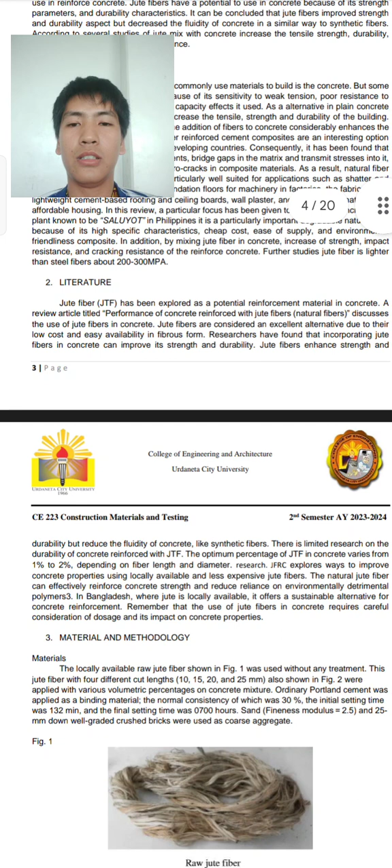Let's first tackle the literature. Jute fiber has been explored as a potential reinforcement material in concrete. A review article entitled Performance of Concrete Reinforced with Jute Fibers, known as natural fibers, discusses the use of jute fiber in concrete.

It enhances durability but reduces the fluidity of concrete like synthetic fibers. There is limited research on durability. The optimum percentage of jute fiber in concrete varies from 1% to 2% depending on the fiber length and diameter.

So let's proceed to the material and methodology. The locally available raw jute fiber is shown in the figure. As you can see, there are different sizes: the 10 millimeter cut, then 15 up to 25 millimeter cutting.

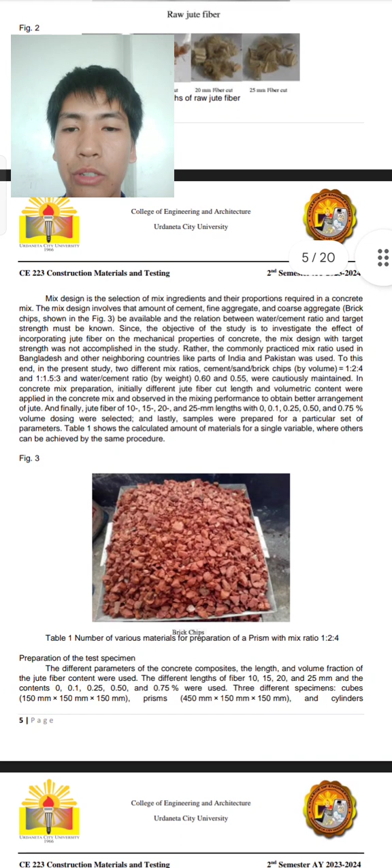In concrete mix design is the selection of mix ingredients and their proportions required in a concrete mix. The mix design involves the amount of cement, fine aggregates, and coarse aggregates. The relationship between water-cement ratio and target strength must be known, since the objective of the study is to investigate the effect of incorporating jute fiber on the mechanical properties of concrete.

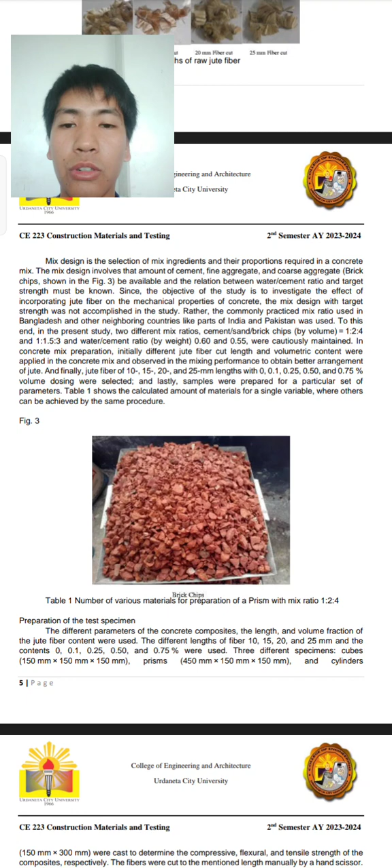So what are these ratios? What are the sample ratios? By volume, cement, sand, and brick chips of 1:2:4, and next 1:1.5:3. The water-cement ratio by weight of 0.60 and 0.55 was cautiously maintained.

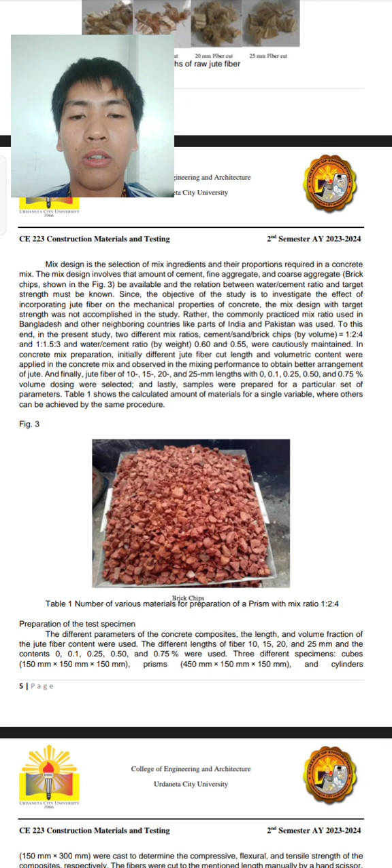For mixing performance, to obtain a better arrangement of jute, finally jute fiber of 10, 15, 20, and 25 millimeter lengths were used, with 0, 0.1, 0.25, 0.50, and 0.75% volume dosing.

We can see table 1, which is the preparation for the test specimens. Let me zoom in. It shows the different parameters of the concrete composite, the length and volume fraction of the jute fiber content.

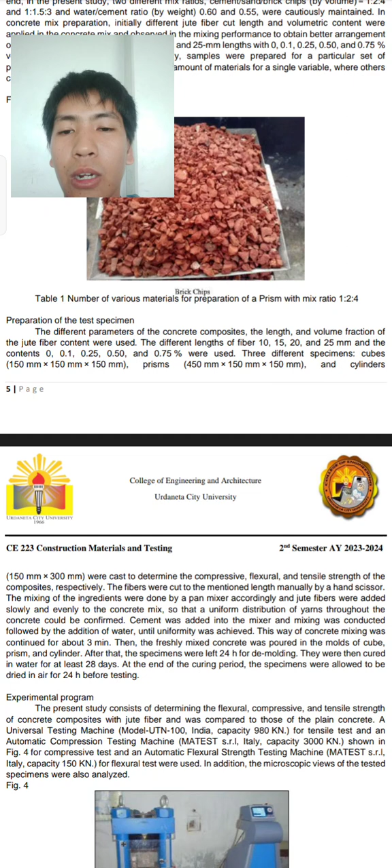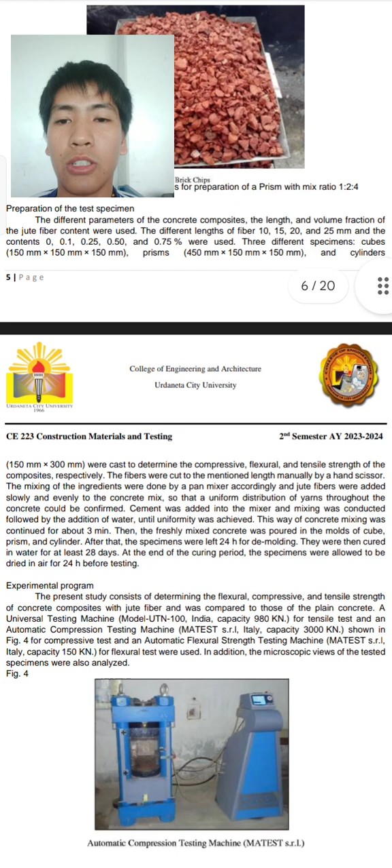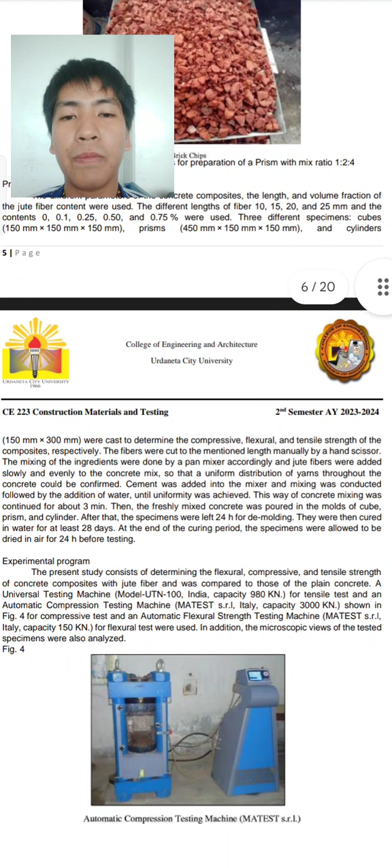We used different lengths of fiber: 10, 15, 20, and 25 mm, with contents of 0, 0.1, 0.25, 0.50, and 0.75%. We used 3 different specimen groups: 150 mm x 150 mm x 150 mm, the prism one at 450 mm, and cylinders 150 mm x 300 mm.

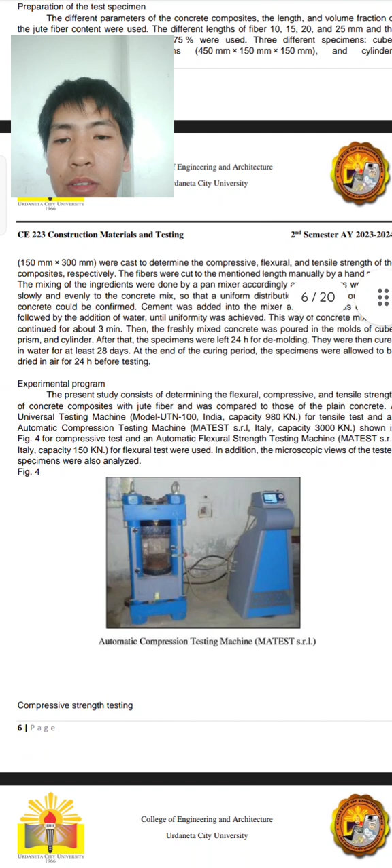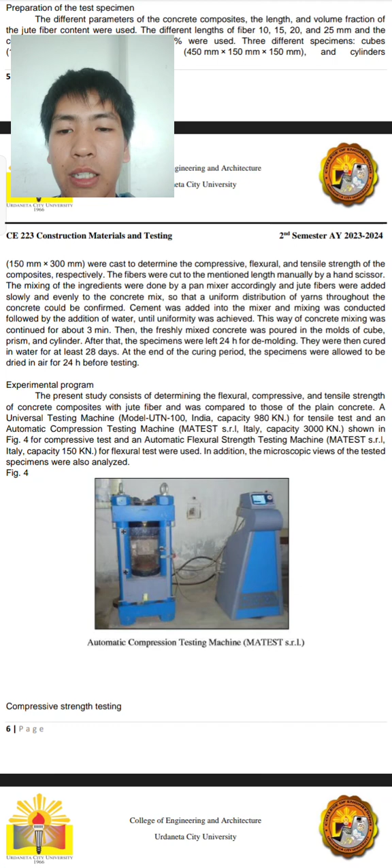Next is the experimental program. The present study consists of determining the flexural, compressive, and tensile strength of concrete composite with jute fiber, and this was compared to plain concrete.

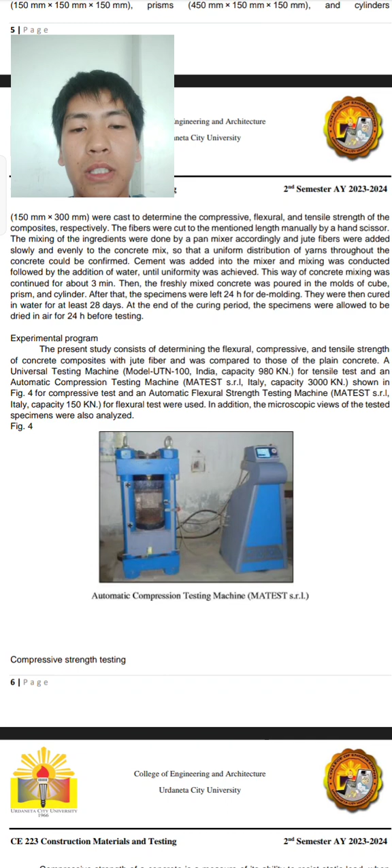The universal testing machine, model UTN 100, from India, with capacity of 980 kilonewton, was used for the tensile test. An automatic compression testing machine, MATEST s.r.l from Italy, with capacity of 3,000 kilonewton, and another from Italy with capacity of 150 kilonewton, was used for the flexural test.

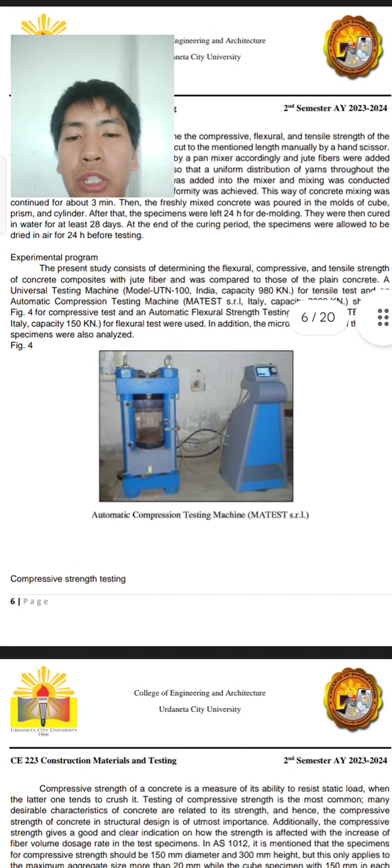This is called the automatic compression testing machine. Compressive strength of concrete is a measure of its ability to resist static load. Here we measure its resistance to static loads, meaning loads that do not move.

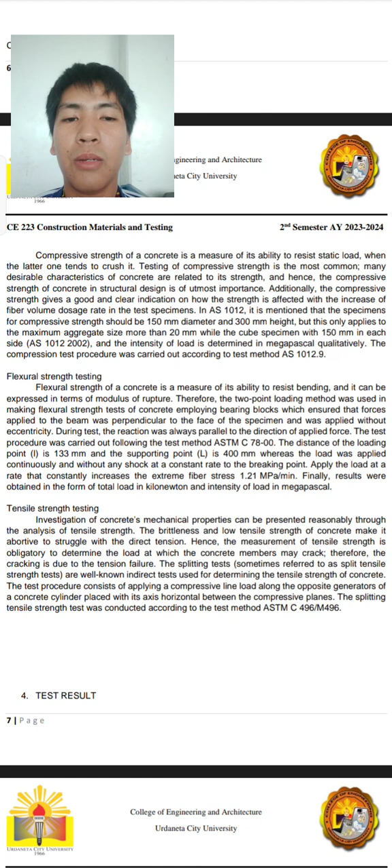The latter one tends to crush it. Testing of compressive strength is the most common and most desirable characteristic of concrete related to its strength. This is the most common test needed for these kinds of construction materials.

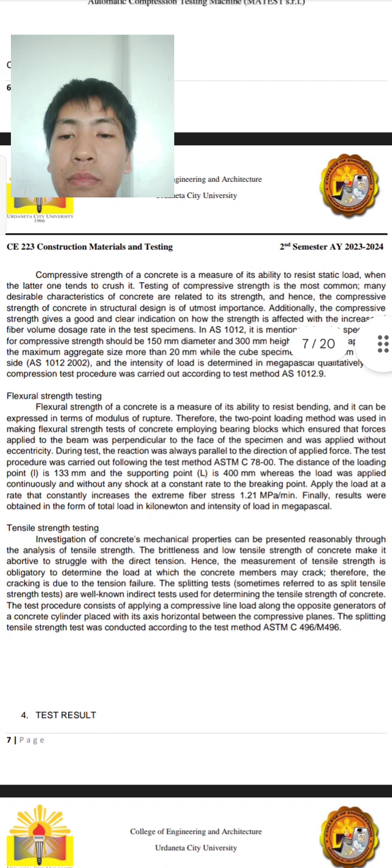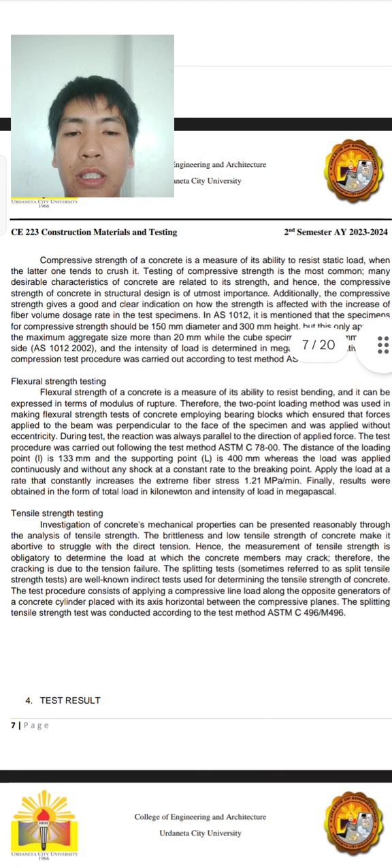Next is the flexural strength testing. Flexural strength of concrete is a measure of its ability to resist bending. This is also one of the most important tests because it tests the ability to resist bending, so that it doesn't bend or break.

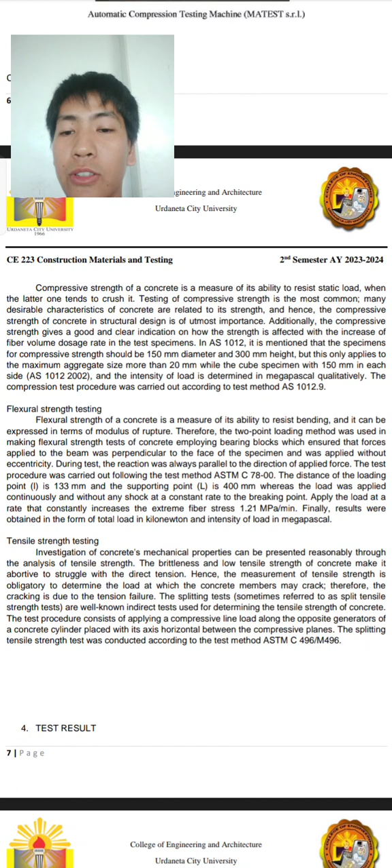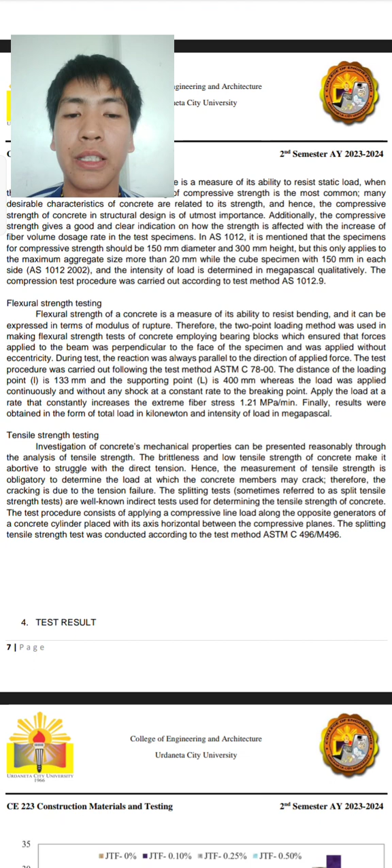Next is the tensile testing, which is an investigation of concrete's mechanical properties that can be presented reasonably through the analysis of tensile strength. Now let's move on to the test results.

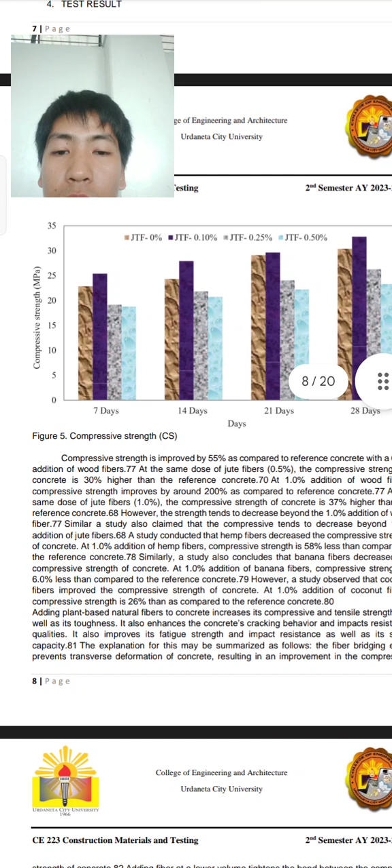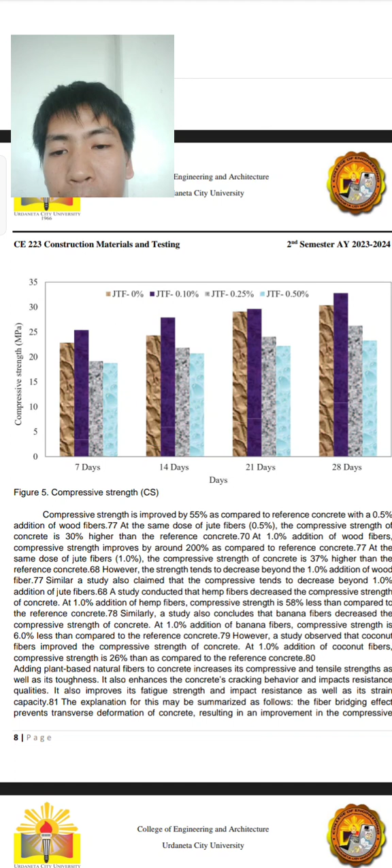So andito yung days - 7 days, 14 days, 21 days, then 28 days. Dito sa gilid, makikita natin yung 0 to 35, yan yung MPa, which is the compressive strength.

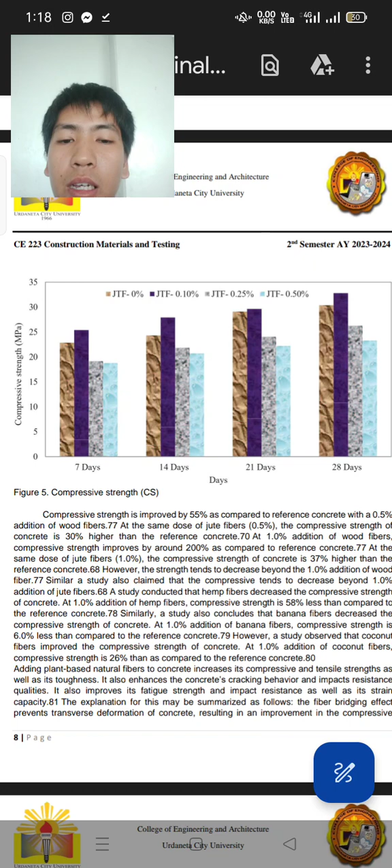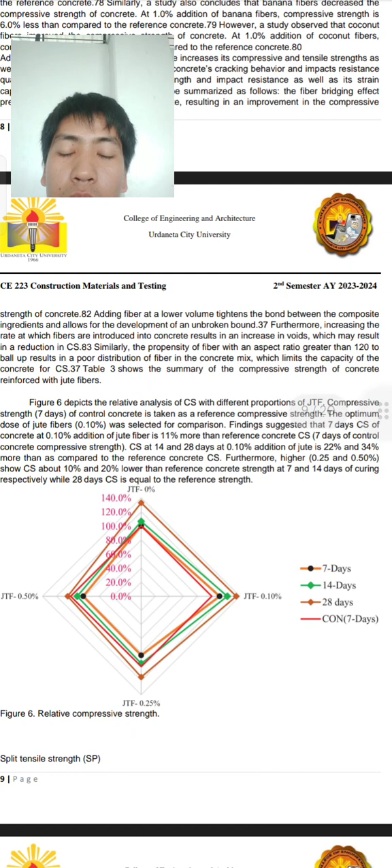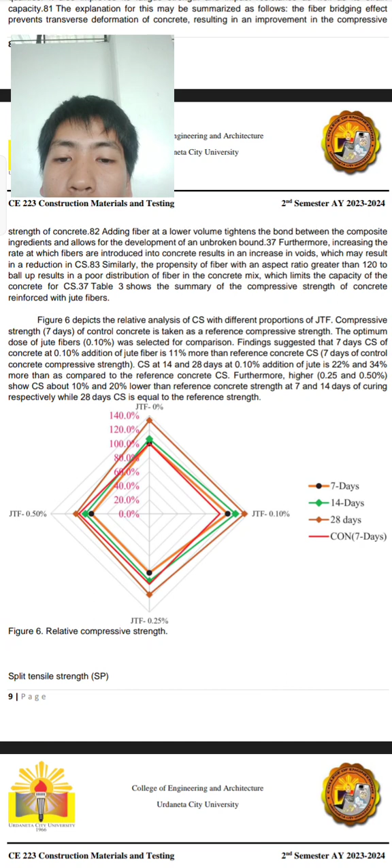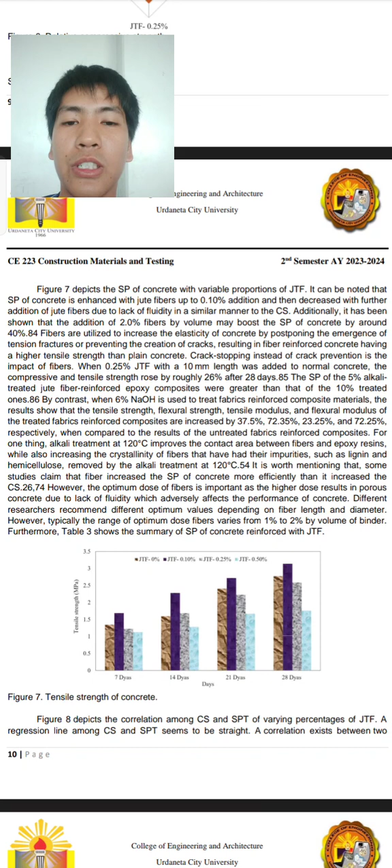So next, figure number 7, depicts the SP of concrete with variable proportion of jute fiber. Noted that the SP ay enhanced with jute fiber up to 0.10% addition, then decrease with further addition. Shown that the addition of 2% fibers by volume may boost the SP of concrete. So ito po siya.

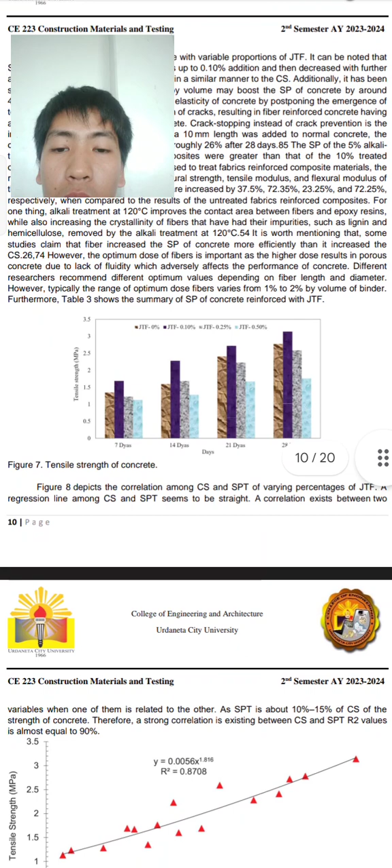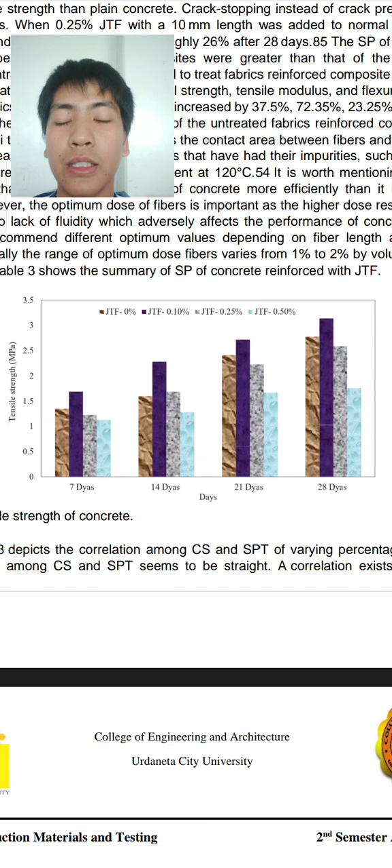Dito naman po, itong table na ito is the tensile strength. Makikita po natin, i-zoom in ko lang. Sa baba niya ulit po, yan po yung mga days, then yung mga recent testing po na ginawa ng ibang researcher.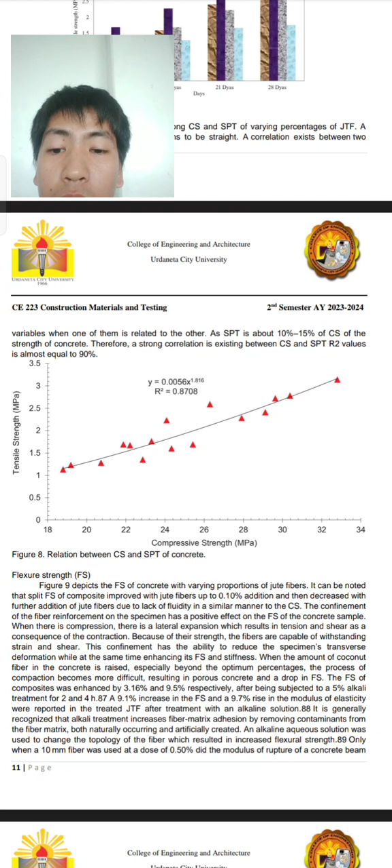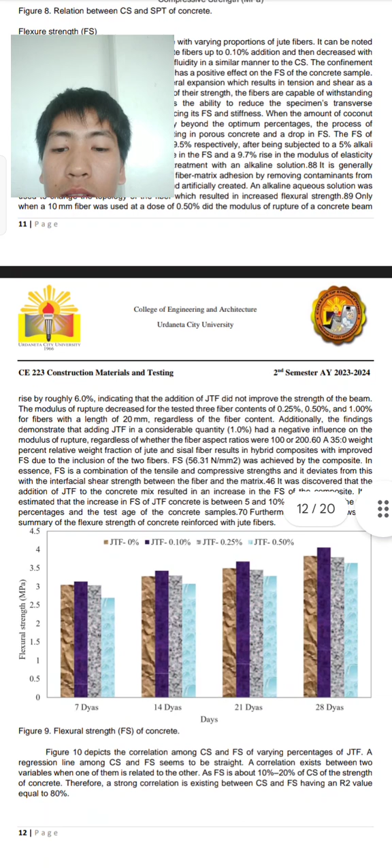So next na natin, ito na dyan, flexural strength. Figure number 9, ito po siya. Pakita ko na lang po yung iba. Flexural strength again, then CS and FS.

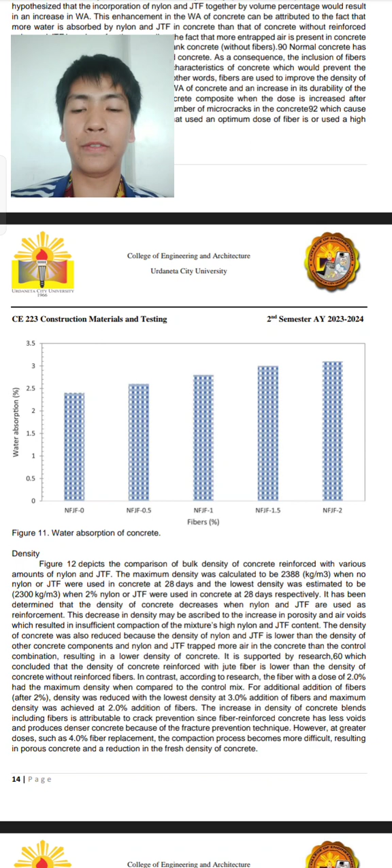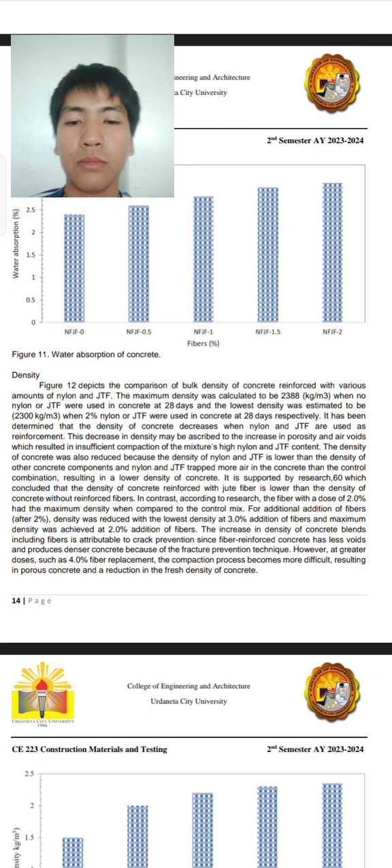Then ito, one of the most important, the water absorption of concrete. So density - figure depicts the comparison of bulk density of concrete reinforced with various amounts of nylon and jute fiber. The maximum density was calculated to be 2,388 kg per cubic meter when no nylon or jute fiber were used in concrete at 28 days. The lowest density was estimated to be 2,300 kilogram per cubic meter when 2% nylon or jute fiber were used in concrete at 28 days respectively. So yan po.

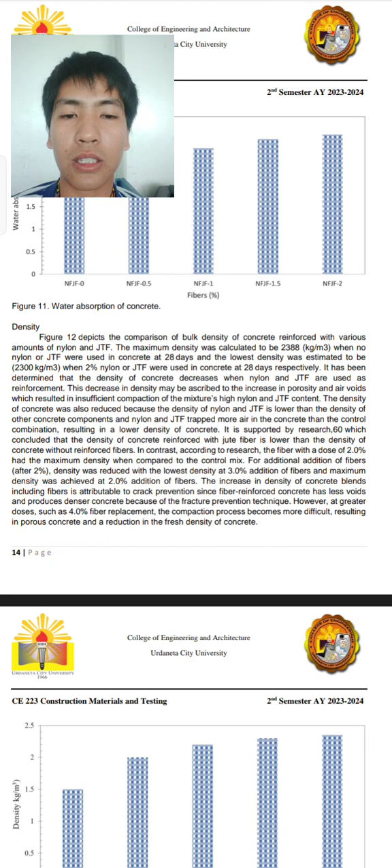Ito siya, yung percentage ng fibers, then yung density.

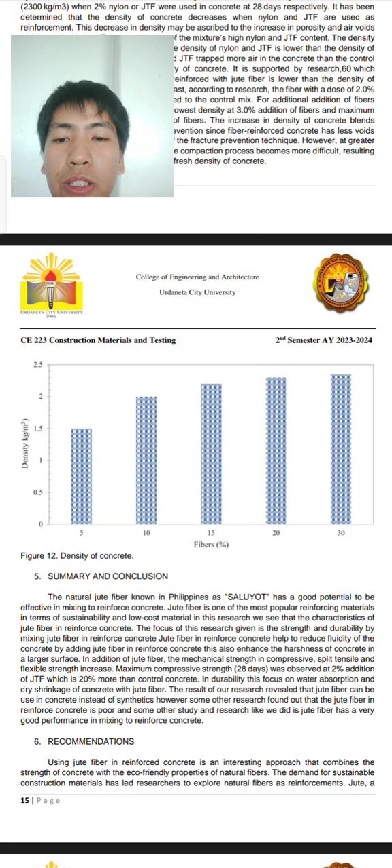Then on summary, so the natural fiber known in the Philippines as saluyot - gulay siya, kinakain natin siya, masarap siya, masustansya siya. Pero di natin alam, ito pala ay isang uri ng fiber. Has a good potential to be effective in mixing to reinforced concrete.

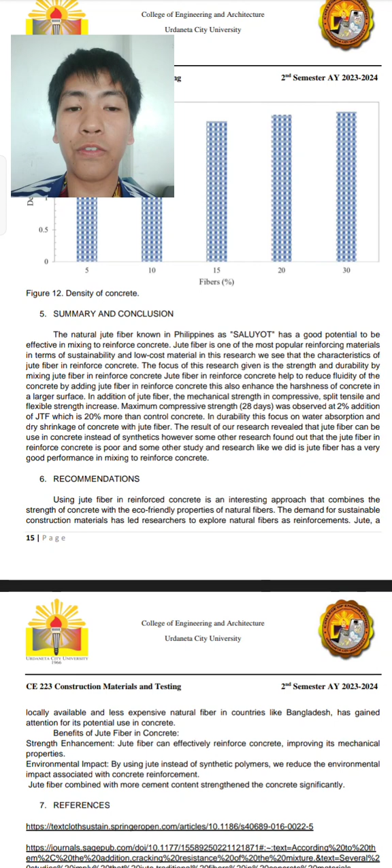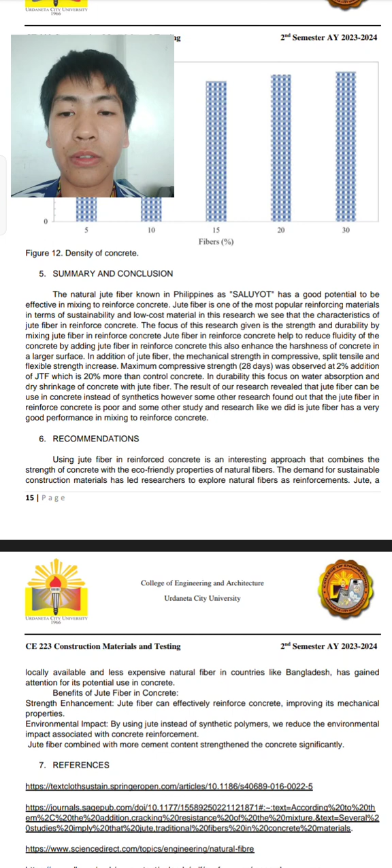So jute fiber is one of the most popular reinforced material in terms of sustainability and low cost. The focus of this research is given the strength and durability by mixing jute fiber in reinforced concrete. Jute fiber in reinforced concrete helps to reduce fluidity of the concrete by adding jute fiber, and this also enhances the harshness of the concrete in a large surface.

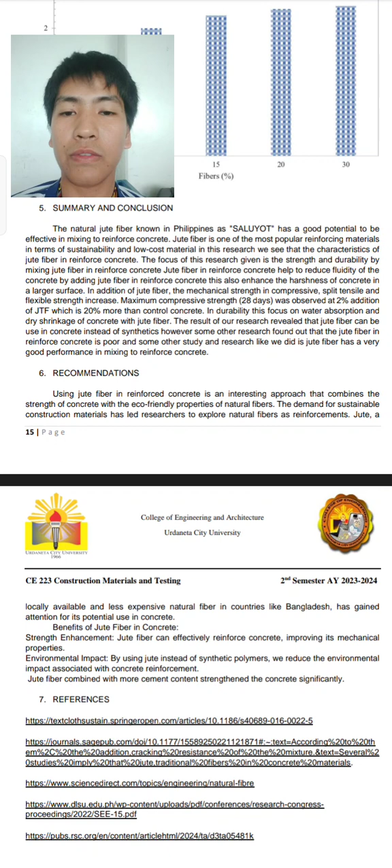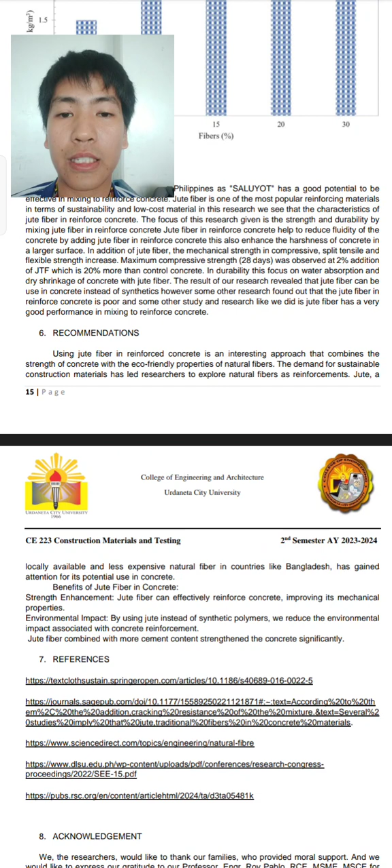In addition of jute fiber, the mechanical strength in compressive, split tensile and flexible strength increase. Maximum compressive strength in 28 days was observed at 2% addition of jute fiber, which is 20% more than control concrete. In durability, focus on water absorption and use instead of synthetic.

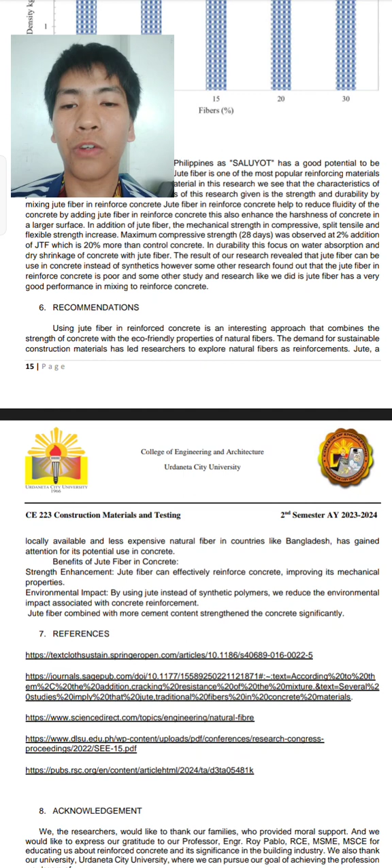However, some other researchers found that jute fiber reinforced concrete is poor, and some other studies and research like we did show that jute fiber has a very good performance in mixing to reinforced concrete. So using fiber in reinforced concrete is an interesting approach that combines the strength of concrete and eco-friendly properties of natural fibers.

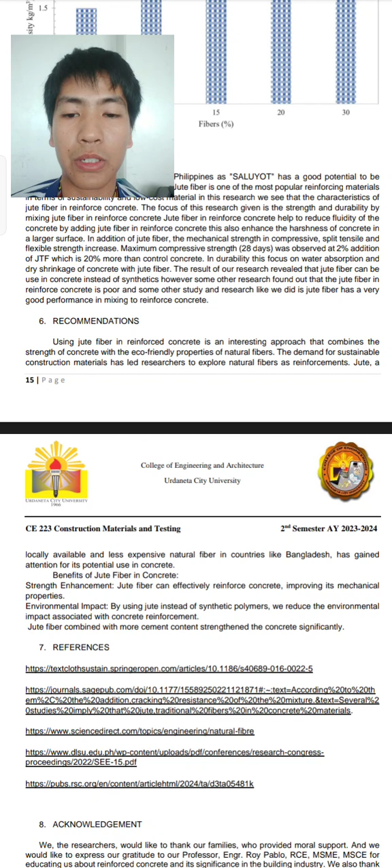So sa baba niya, makikita natin dito yung references, then different acknowledgements, then personal information.